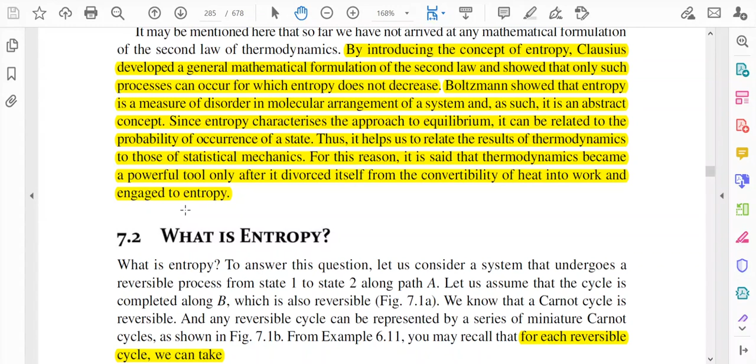So what is entropy? To answer this question, let's consider a system that undergoes a reversible process from state 1 to state 2 along path A. I will show you the figure shortly, but let us assume that the cycle is completed along path B, which is also reversible. Now let me show you the figure.

So this is the figure. This is state 1 to state 2. This is a path, the cycle goes 1-A-2 and then it is completed from 2 to 1 through path B. So it is a cyclic process. It goes first through path A, and then from 2 to 1 through path B.

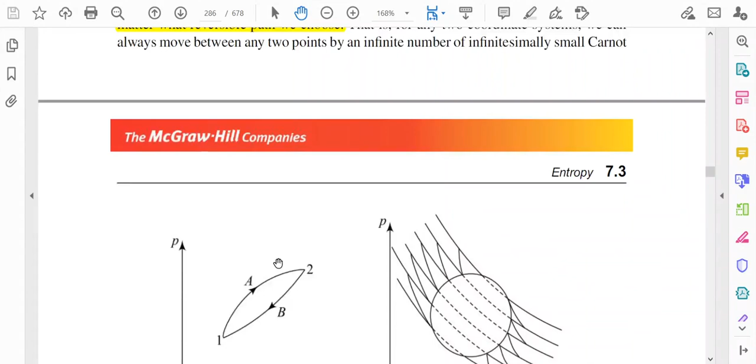And this is basically a reversible process. We know that a Carnot cycle is reversible. We have already discussed the Carnot cycle, and any reversible cycle can be represented by a series of miniature Carnot cycles, which is shown in a figure.

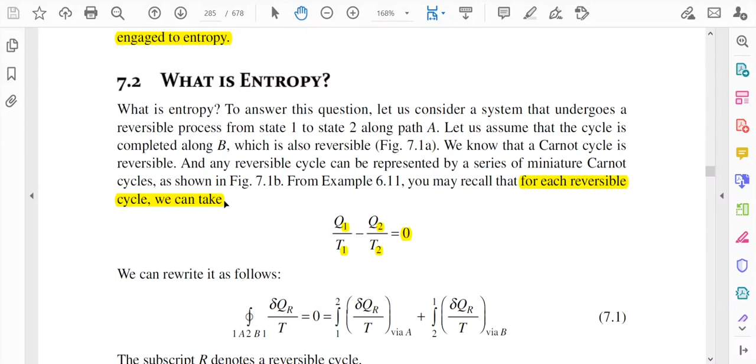I will show you the figure. Now you see this circular path — this is a cycle and it is a reversible cycle. Inside the circle, a series of curves has been drawn. This curve is the isotherm, and the steeper curve is the adiabatic curve. Two types of curves are drawn here, you can see it clearly. For example, this one is isothermal and the steeper one is adiabatic. This is isothermal, again adiabatic. In this way several curves are drawn.

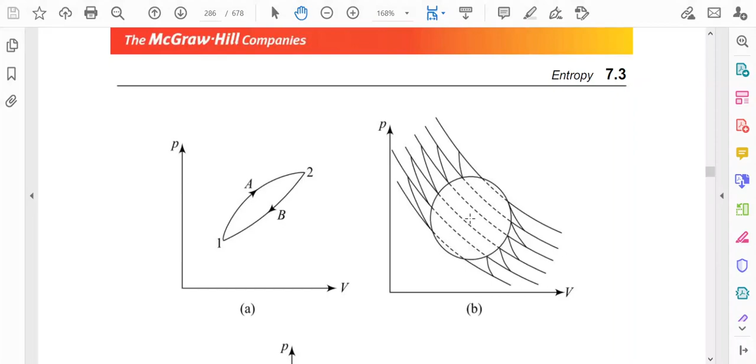Now these curves pass through the circle. So if you consider a particular rectangular path, for example, this one, we can consider it almost a rectangle. In this way we can divide the circle into a series of rectangles, and we can consider these as Carnot cycles. So a cyclic process can be divided into a series of Carnot cycles.

Now in our earlier lecture we discussed that for a reversible cycle, the algebraic sum of q by t is equal to 0. From that concept we can write that for each reversible cycle, q1 by t1 minus q2 by t2 is equal to 0, as shown earlier that the sum of q by t is equal to 0.

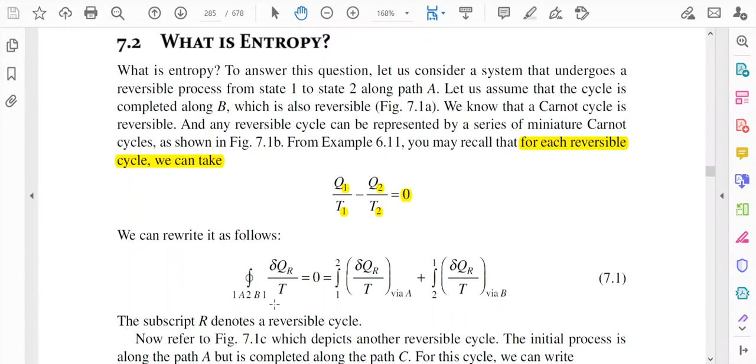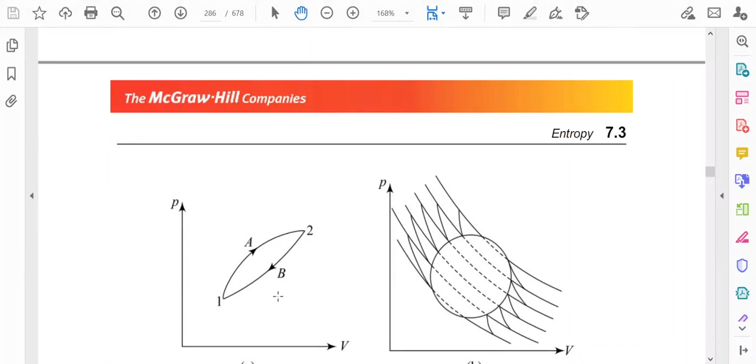So we can write, from that concept, the closed integration of delta qr by t, through the path 1A2B1 — meaning 1A2B1 along this closed path, which is a reversible path. In this case, the reversible integral is equal to 0, from the concept that the sum of q by t is equal to 0.

Now we can divide the closed path into two paths: from 1 to 2, delta qr by t via a, plus from 2 to 1, delta qr by t via b. The subscript r denotes a reversible cycle. Here there is a subscript r, delta qr, written to denote the reversible cycle.

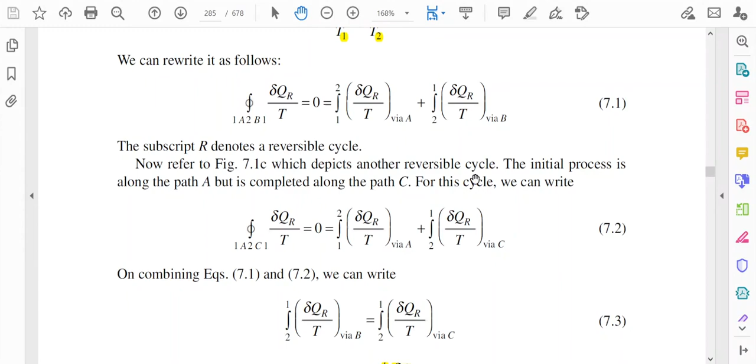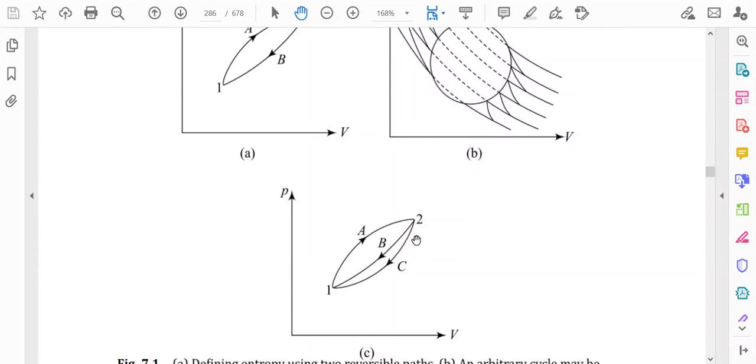So the initial process is along path A but is completed along path C. For this cycle we can write that the closed integration of 1a to c1, delta qr by t, is equal to 0. So if we consider 1a to c1, this closed path...

...then we can write that the closed integration of 1a to c1, delta qr by t, is equal to 0, and we can again divide the path into two paths: one from 1 to 2, delta qr by t via a, and another from 2 to 1, delta qr by t via c.

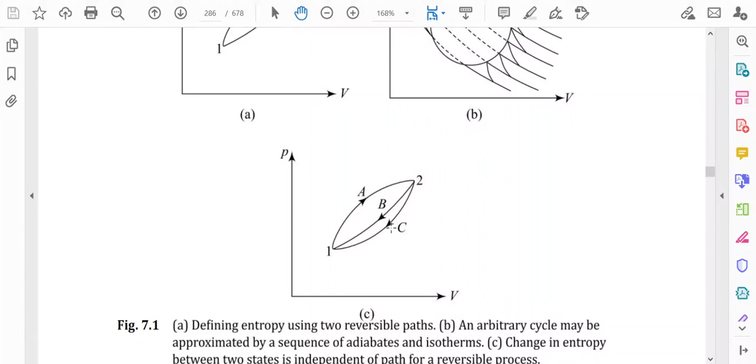Now if we combine these two equations, that is 7.1 and 7.2, then we can write that 1 to 2 delta Qr by T via B is equal to 1 to 2 delta Qr by T via C. In the figure you can see they have considered three paths: 1a to b1 and another path 1a to c1. That is, when the state moves from 2 to 1, it can go through two paths, one through point B and another through point C. Combining these two equations, we can show that delta Qr by T via B is equal

to delta Qr by T via C. This result strongly suggests that the integral 1 to 2 delta Qr by T is the same between states 2 and 1, no matter what reversible path we choose. We have shown in the last figure there are several reversible paths, but the value of the integration 1 to 2 delta Qr by T does not depend on the path. That is, for any two coordinate systems we can always move between any two points by an infinite number of infinitesimally small

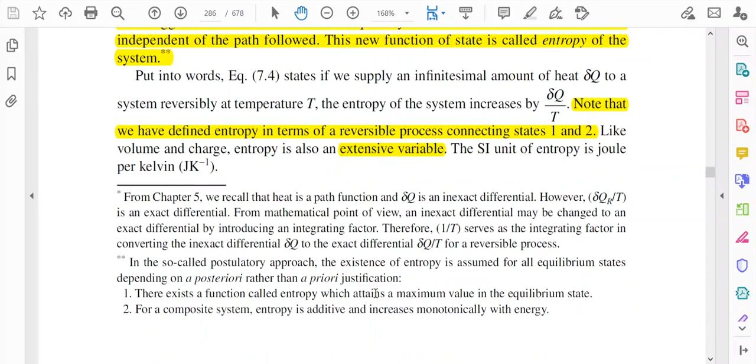Carnot cycles, and whatever path we take we will get the same result. Mathematically we can say that delta Qr by T is an exact differential, and we can write it as delta Qr by T equal to dS. This is the rule of the exact differential, which we know about. This suggests that we can define a new quantity S, which is a function of state and is independent of the path followed. This new function of state is called the entropy of the system. So here the quantity S is known as the entropy.

Put into words, this equation states that if we supply an infinitesimal amount of heat delta Q to a system reversibly at temperature T, the entropy of the system increases by delta Q by T. We have to note that we have defined entropy in terms of a reversible process connecting two states, state 1 and 2, and like volume and charge, entropy is also an extensive variable. The SI unit of entropy will be joule per Kelvin, as dS is equal to delta Q by T, so the unit of S will be joule per Kelvin in SI units.

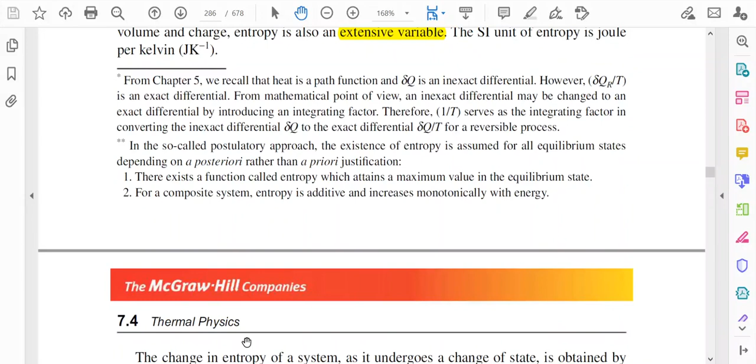The change of entropy of a system as it undergoes a change of state is obtained by integrating equation 7.4. If you integrate it, you get the difference of entropy in two states, that is S2 minus S1, equal to delta S, equal to the integral from 1 to 2 of delta Qr by T. So this equation enables us to determine changes in entropy along a reversible path in going from one state to another.

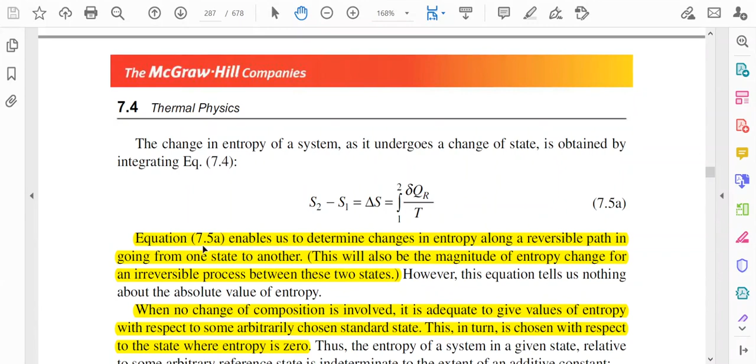This will also be the magnitude of entropy change for an irreversible process between these two states. So the difference of entropy, this line is very important: this will also be the magnitude of entropy change for an irreversible process between these two states. Although we have defined entropy in terms of the reversible path, the difference of entropy will be the same even though the process is irreversible.

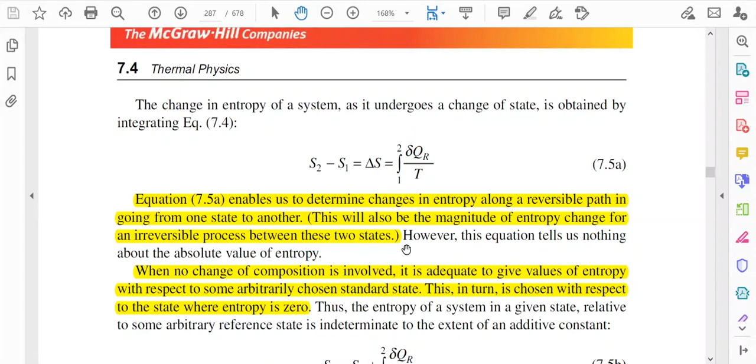But this equation tells us nothing about the absolute value of the entropy, because this is the difference of entropy. When no change of composition is involved, it is adequate to give values of entropy with respect to some arbitrarily chosen standard state. This in turn is chosen with respect to the state where entropy is zero. Thus, the entropy of a system in a given state relative to some arbitrary reference state is indeterminate to the extent of an additive constant.

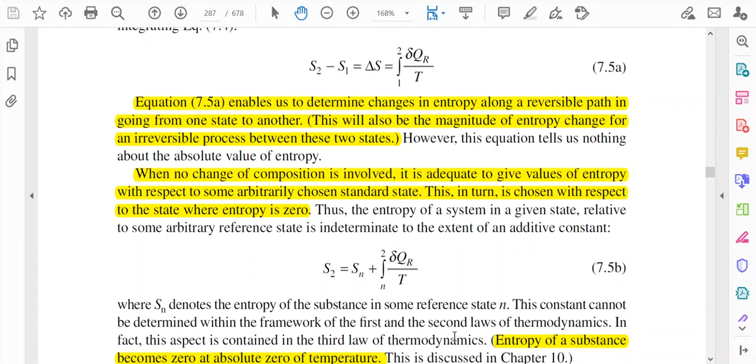That means we can write S2 equal to Sn plus the integral from n to 2 of delta Qr by T. Here Sn denotes the entropy of the substance in some reference state n. This constant cannot be determined within the framework of the first and second laws of thermodynamics. In fact, this aspect is contained in the third law of thermodynamics. The third law states that the entropy of a substance becomes zero at absolute zero temperature. So basically, the reference state is the entropy at absolute zero. In that case, we can say that Sn corresponds to the entropy of the state at absolute zero.

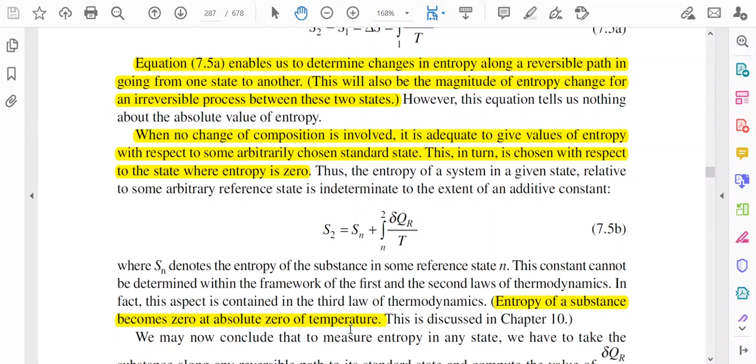So in that case, we can measure the entropy of a substance, which is the absolute value. Here S2 is the absolute value. If we want to measure the absolute value of the entropy, we have to define some reference state. Here Sn is the reference state.

We may now conclude that to measure entropy in any state, we have to take the substance along a reversible path to its standard state and compute the value of delta Qr by T along this path. So what we have to do is compute the value of delta Qr by T. But keep in mind that what we are actually measuring is the change of entropy.

Obviously, for a cyclic reversible process, there will be no net entropy change. Thus, we can write the closed integration of delta Q by T reversible is equal to 0. So for a reversible cycle, the closed integration of delta Q by T is equal to 0.

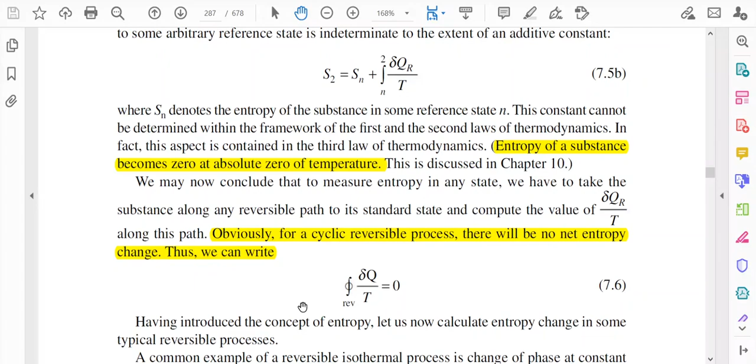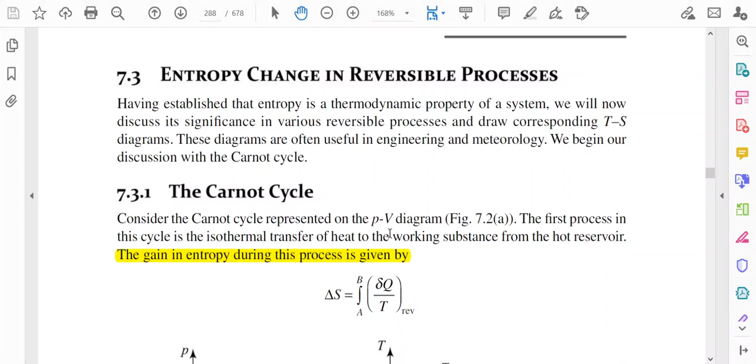Now we will discuss entropy in the context of the Carnot cycle. We have already discussed the Carnot cycle by drawing the PV diagram in earlier lectures. So this is the Carnot cycle in the PV diagram. Now we will discuss the Carnot cycle step by step by considering the concept of entropy.

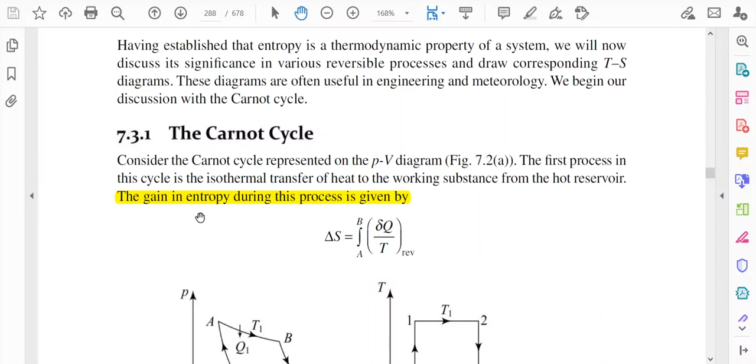The first process in this cycle is the isothermal transfer of heat to the working substance from the hot reservoir. The gain in entropy during this process is given by delta S, equal to the integral from A to B of delta Q by T, and that is a reversible process. So this is the change of entropy for the cycle AB.

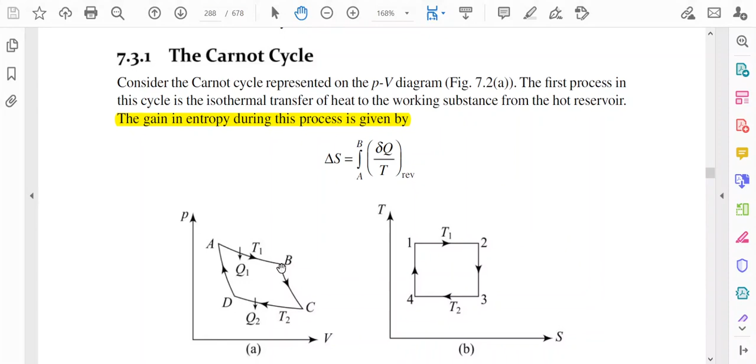Since the temperature of the working substance remains constant - you see this one is T1 - this equation can be integrated. Since T is constant, we can place it outside the integration. So we can write delta S equals 1 by T1 times the integral from A to B of delta Q, which equals Q1 by T. Here Q1 is the heat absorbed by the system.

This is shown as the horizontal line 1 to 2 on the TS diagram. You see, this axis is the entropy axis and this axis is the temperature axis. So what we have seen here is the change of entropy in this process, that is delta S, which is actually fixed.

This value is Q1 by T. Here temperature is constant and heat Q1 is the heat absorbed. So ultimately we can define the process by a straight line - here change of entropy, that is entropy change, and this one is the temperature. Here temperature is fixed, and delta S can be measured as Q1, the heat absorbed by the system, divided by T.

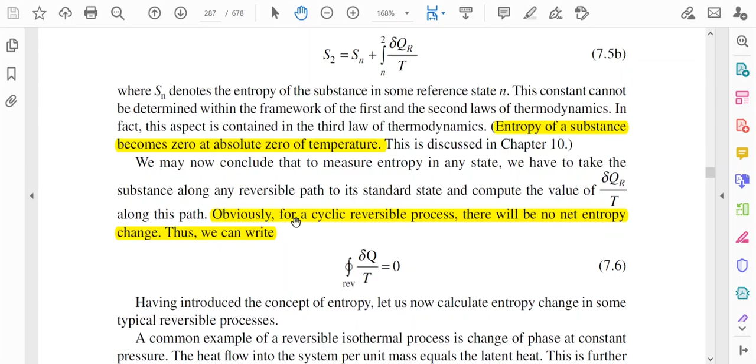The second process in the Carnot cycle is a reversible adiabatic expansion. Since no heat is exchanged in this process, delta Q will be 0, and it readily follows from equation 7.4 that entropy remains constant in an adiabatic process. You see equation 7.4 again: delta Qr by T equals dS. So if delta Q is equal to 0, dS is equal to 0, or S is equal to constant.

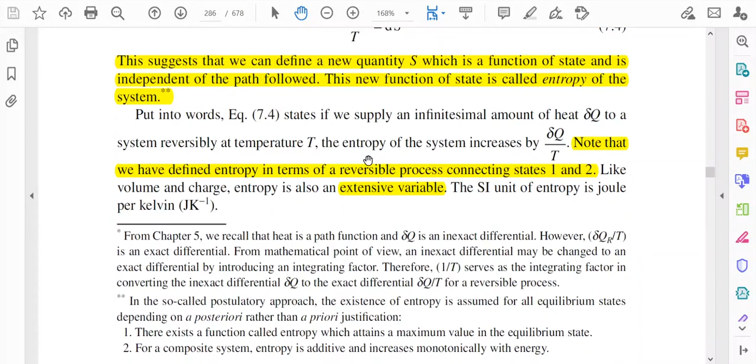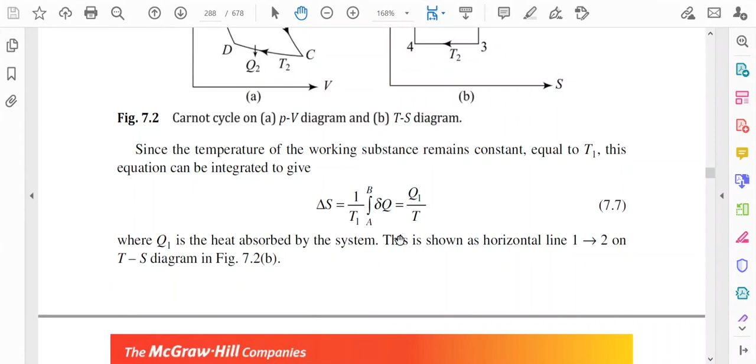So in the first process, the value of entropy change is given by delta S equals Q1 by T. But in the second case, dS is equal to 0, so entropy remains constant in the reversible adiabatic process. This step can be shown in this figure, and if this is the entropy axis, you see that the value of entropy is constant here, for the process 2 to 3.

Now let us discuss the third process. This is a reversible isothermal compression in which heat is transferred from the working substance to the cold reservoir. You see the PV diagram - CD is the third process. Here this is the Q2 amount of heat, which is transferred from the working substance to the cold reservoir, and the value of the temperature in this process is T2, which is constant.

So we can write delta S equals the integral from C to D of delta Q by T, reversible, and since T is constant, we can place it outside the integral. So we can write 1 by T2, but here we have written minus Q2 - this one is actually delta Q. So we have written minus Q2. The negative sign signifies that heat is rejected by the working substance during this process.

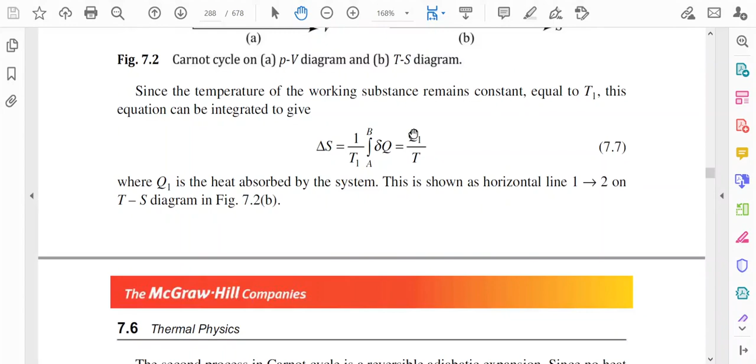If we compare this equation with the previous one, you see that this one was Q1 by T1 with a positive sign, and this one is Q2 by T2 with a negative sign. This equation indicates that the entropy of the working substance decreases during isothermal compression, as this is a compression process, isothermal compression. So in this process entropy decreases.

This is shown by the horizontal line 3 to 4, meaning that 3 to 4 is the isothermal compression process. Now in the third step, equation 7.8 indicates that the entropy of the working substance decreases during isothermal compression. We have already shown this in figure 3 to 4 through the horizontal line.

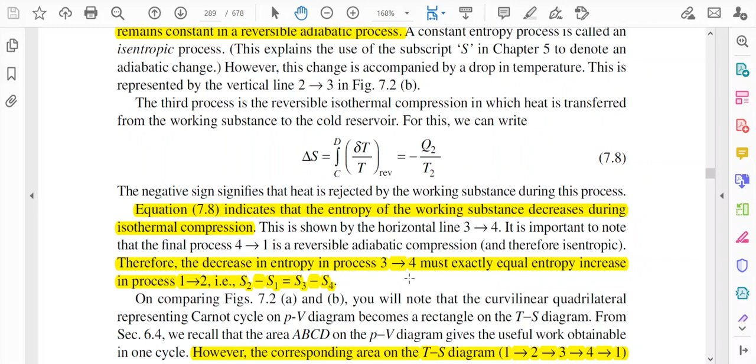It is important to note that for the final process 4 to 1, that is actually a reversible adiabatic compression. So therefore it will also be an isentropic process, that is entropy will remain constant.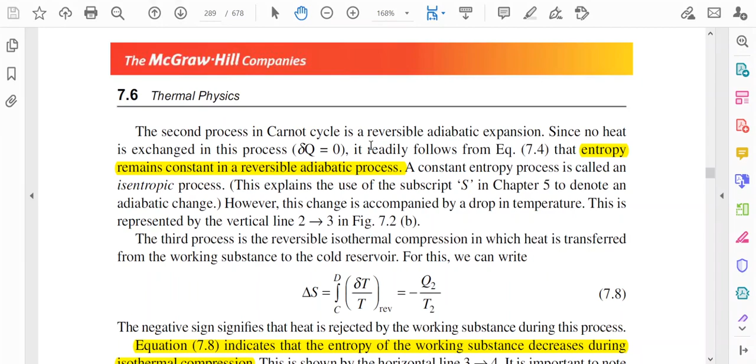Actually this process is just like the previous process, this line 2 to 3. In that case entropy was constant as delta Q was 0, so entropy remains constant. Similarly, this one was reversible adiabatic expansion, and the fourth process is the opposite, reversible adiabatic compression. It is not expansion, it is compression, but as Q is equal to 0, in this case again entropy will remain constant.

Therefore, the decrease in entropy in the process 3 to 4 must exactly equal the entropy increase in the process 1 to 2. We have observed that in process 3 to 4 entropy decreases, and in process 1 to 2 entropy increases. So those should be equal, that is S2 minus S1 equals S3 minus S4.

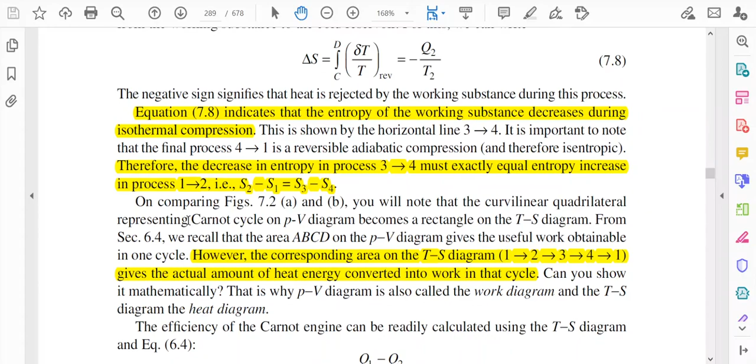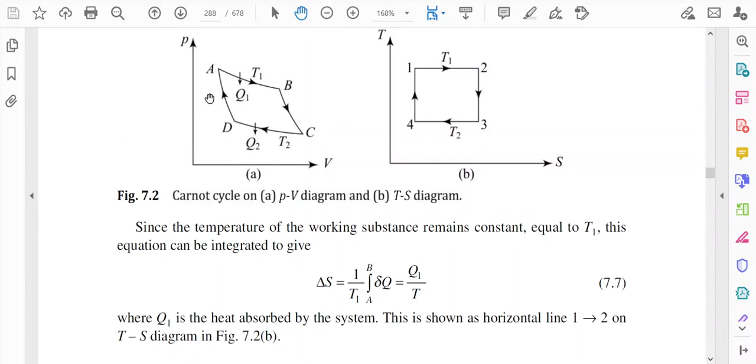Now if we compare figures 7.2a and b, both figures represent the Carnot cycle, but this one is on the PV diagram and this one is on the TS diagram. So if we compare the figures, we will note that the curvilinear quadrilateral representing the Carnot cycle on the PV diagram becomes a rectangle on the TS diagram.

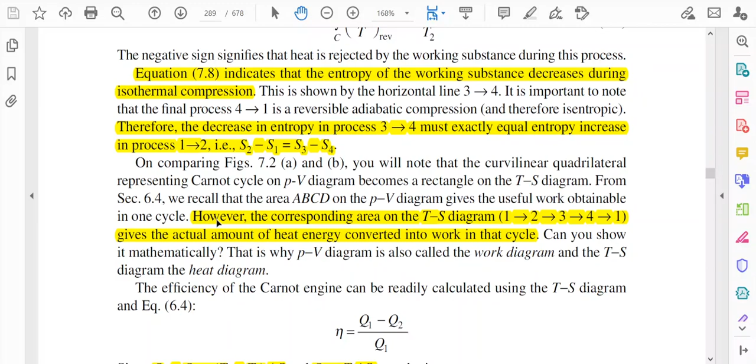We recall that the ABCD area in the PV diagram gave the useful work obtainable in one cycle. We have discussed that if we represent the Carnot cycle in the PV diagram, that area actually gives you the value of the useful work obtainable. But if we consider the TS diagram, then this is actually a rectangle.

So in this case the area under the curve will define the heat diagram, that is, it will represent the actual amount of heat energy converted into work in that cycle. Because what is the definition of entropy? That is, ds equals dq by t. So entropy represents the amount of heat energy being converted into work in a particular cycle. That is why the PV diagram is called the work diagram and the TS diagram is called the heat diagram.

So the area under the curve in the TS diagram gives us the amount of heat energy converted into work in that cycle. And the efficiency of a Carnot cycle, we know that eta equals Q1 minus Q2 by Q1. Now what is Q1 minus Q2? That is delta Q, equal to T1 minus T2 into delta S, because dQ equals T into dS, and Q1 equals T1 into delta S. So if we put these values here, we obtain eta equals 1 minus T2 by T1.

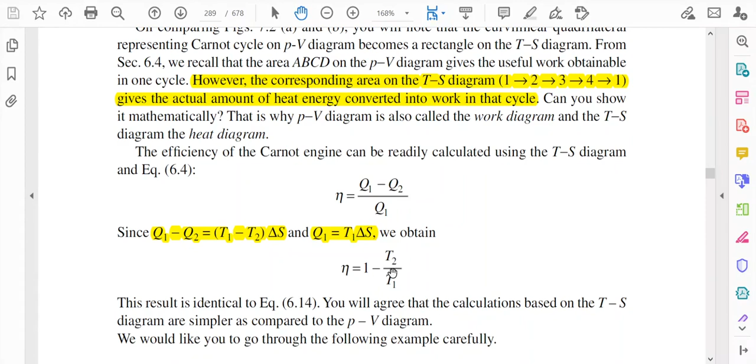Previously we observed that eta equals 1 minus Q2 by Q1. Now we have shown that eta equals 1 minus T2 by T1.

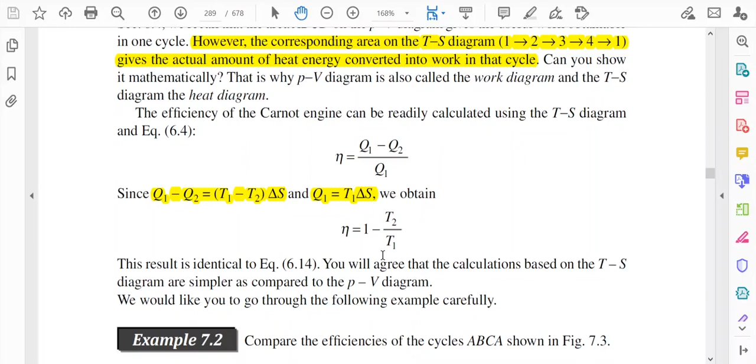Now we will discuss reversible heat transfer. In most reversible heat transfer processes, the temperature is not constant. Then the increase in entropy can readily be calculated from the equation delta S equals the integral from T1 to T2 of delta Q by T, reversible, when temperature is not constant. You see we have given a limit for the temperature, so the initial temperature is T1 and the final temperature is T2.

If we assume that the heat capacity of the system remains constant over the temperature interval of interest, and changes in phase are excluded during this process, we can express delta Q as mc into dT. M and c are constant, so they can be taken outside the integral, and inside the integral only dT will be there. After integrating we get mc ln T2 by T1. This is the expression for entropy change in the case of reversible heat transfer.

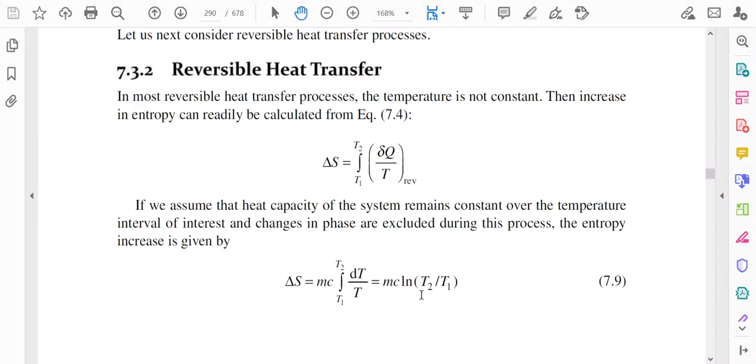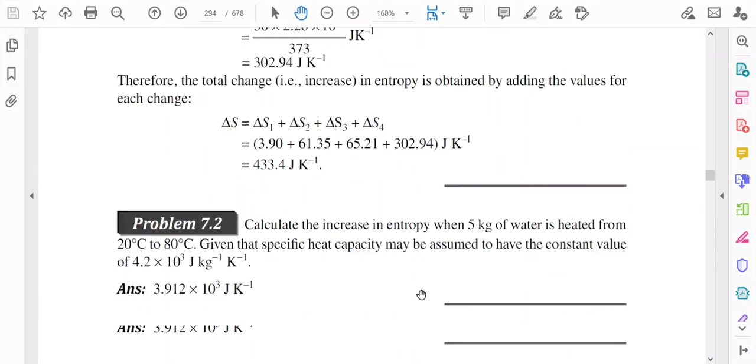Now we will discuss about Clausius inequality. We have already discussed the change of entropy for reversible processes, but a reversible process is a limiting case of a natural process. Therefore, to provide a criteria for the direction of natural change, we should generalize our earlier results for irreversible processes. The first step in this direction is to establish the Clausius inequality.

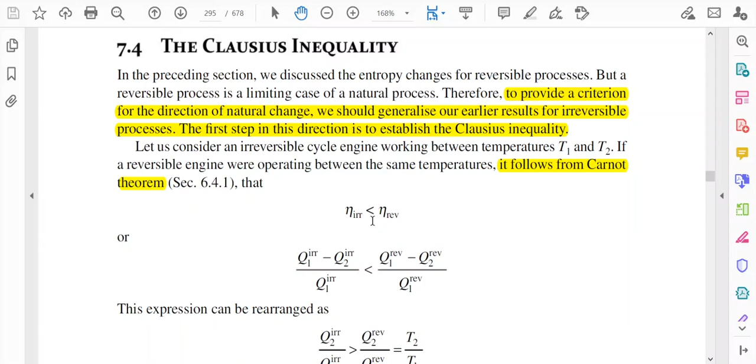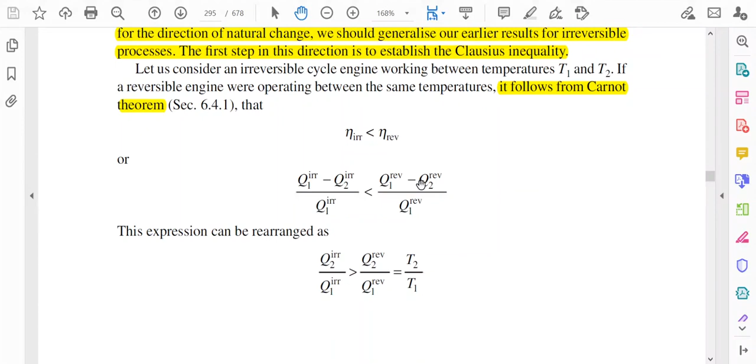Let us consider an irreversible cycle engine working between temperatures T1 and T2. If a reversible engine were operating between the same temperatures, we can say from Carnot's theorem that efficiency for the irreversible engine will be less than efficiency for the reversible engine, that is eta irreversible less than eta reversible. Now from the expression of eta we can write Q1 irreversible minus Q2 irreversible divided by Q1 irreversible less than Q1 reversible minus Q2 reversible divided by Q1 reversible.

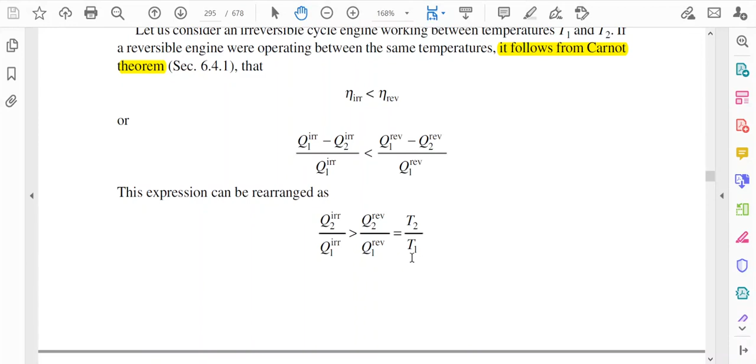After rearranging we can write Q2 irreversible divided by Q1 irreversible greater than Q2 reversible divided by Q1 reversible. But we know we can write Q2 by Q1 as equal to T2 by T1, as we have already shown. So from this inequality we can again write Q2 irreversible by T2 greater than Q1 irreversible by T1.

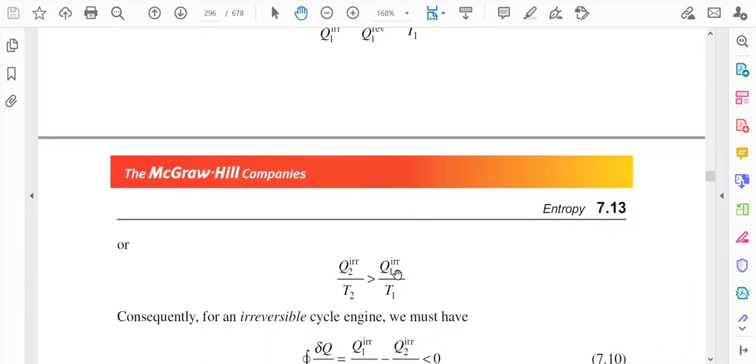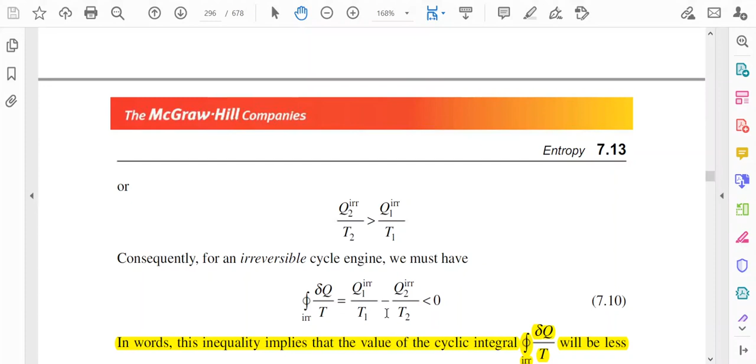So for an irreversible cycle engine we must have closed integration of delta Q by T equal to Q1 irreversible by T1 minus Q2 irreversible by T2. If we put this on the left hand side, we can write closed integration of delta Q by T equal to Q1 irreversible by T1 minus Q2 irreversible by T2, less than 0. In other words, this inequality implies that the value of the cyclic integral closed integration of delta Q by T will be less than 0 for an irreversible process.

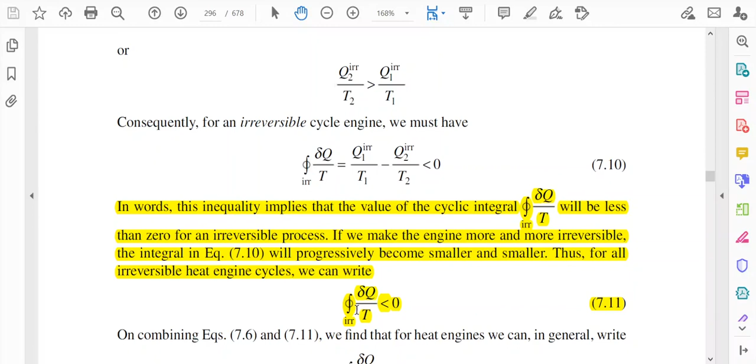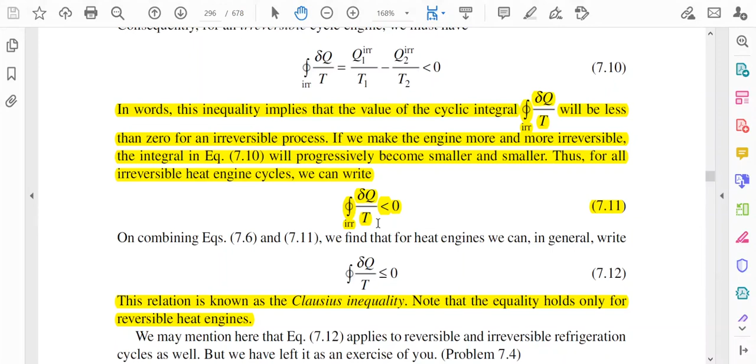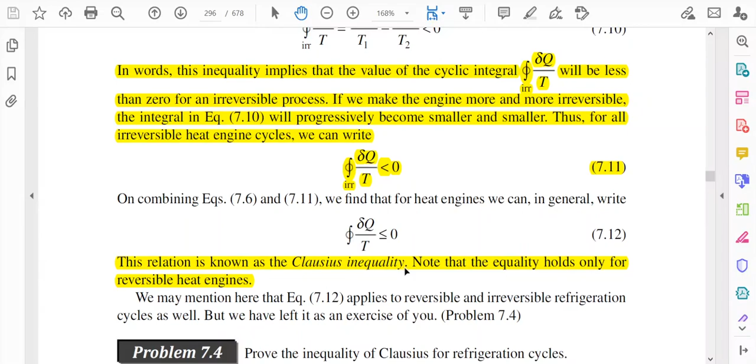If we make the engine more and more irreversible, the integral will progressively become smaller and smaller. Thus, for all irreversible heat engine cycles, we can write closed integration of delta Q by T less than 0. This is an important result. Now, for a reversible engine, we can write closed integration of delta Q by T equal to 0, as we have shown earlier. Combining these two equations, we can write in general, closed integration of delta Q by T less than or equal to 0. This relation is the famous Clausius inequality, and note that equality holds only for the reversible process, while less than is for the irreversible process.

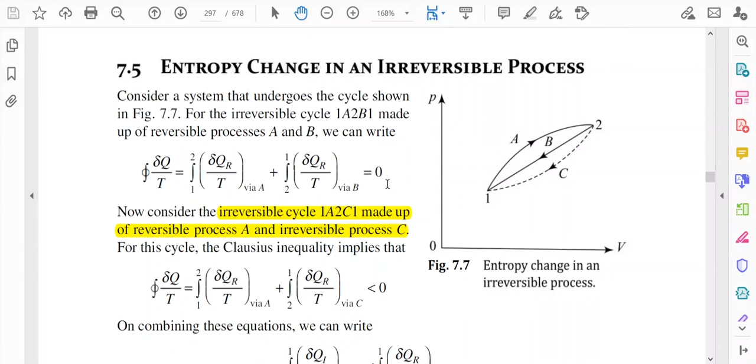So we can write closed integration of delta Q by T, that is equal to 1 to 2 delta QR by T via A plus 2 to 1 delta QR by T via B, that is equal to 0, considering these two paths.

Now consider the irreversible cycle 1A2C1, made up of reversible process A and irreversible process C. So C is an irreversible process. This dotted line is the irreversible process through path C.

Now for this cycle, the Clausius inequality implies that closed integration of delta Q by T, that is equal to 1 to 2 delta QR by T via A plus 2 to 1 delta QR by T via C. And as we are considering an irreversible process, we have to write less than 0, because this is the irreversible cycle and we have considered the path via C, so that should be less than 0.

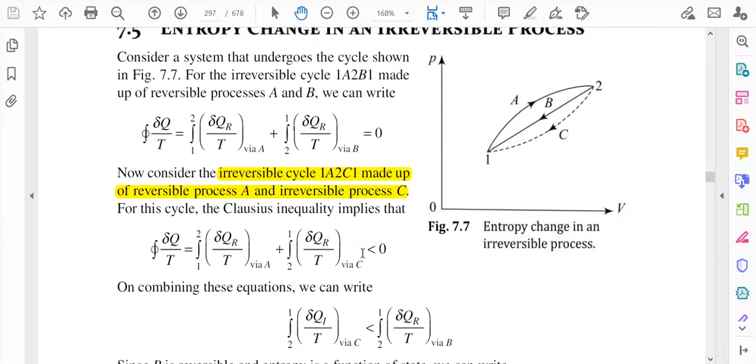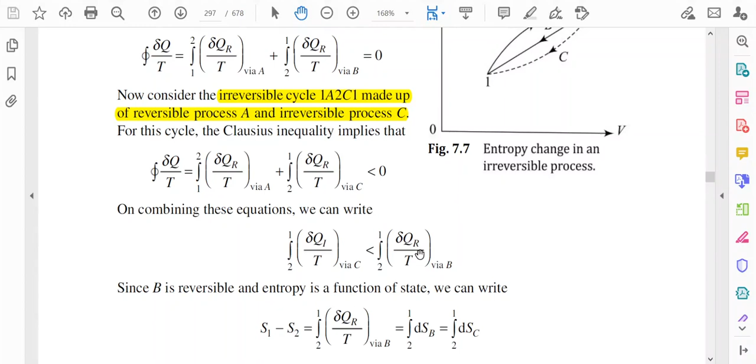Now if we combine these two equations, we can write 2 to 1 delta Qi by T via C less than 2 to 1 delta Qr by T via B, because via A these two equations will be cancelled out. So we can write this equation in this way, and as we have used via C, we have used the index i to indicate the irreversible process, and R to indicate the reversible process.

Since B is reversible and entropy is a function of state, we can write S1 minus S2 equal to 2 to 1 delta QR by T via B, that is equal to 2 to 1 dSB, equal to 2 to 1 dSC. So what is the meaning? The change of entropy depends on the two states only, not on the path. So S1 minus S2 equals 2 to 1 delta QR by T via B. We are writing 2 to 1 dSB, that is through B, and that should be equal to 2 to 1 dSC through path C.

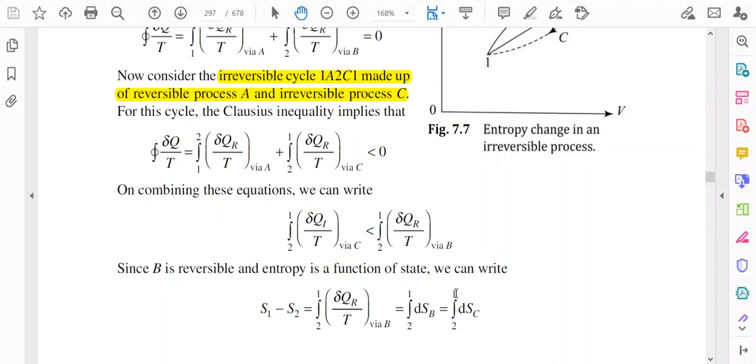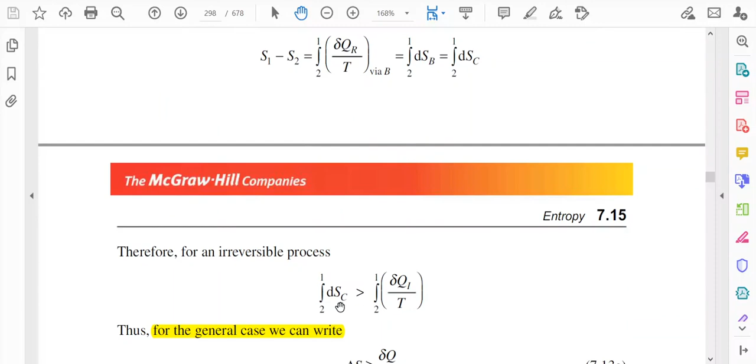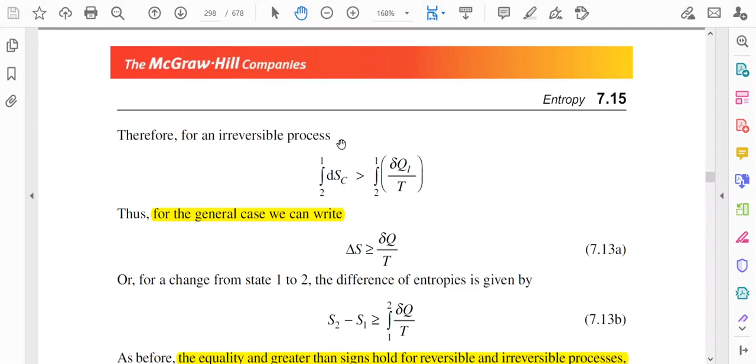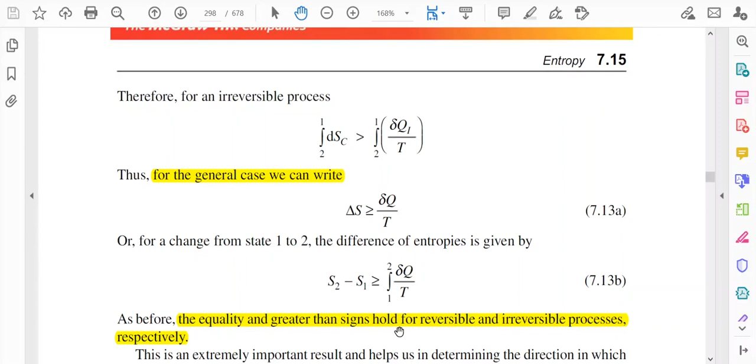Now if we consider this equation and the previous equation, we can write: 2 to 1 delta S greater than delta Qi by T. Here we have delta Qi by T, and we've used delta S on the left side. So 2 to 1 delta S greater than delta Qi by T, using two equations to write this one. For the general case, we can write delta S, the change of entropy, greater than or equal to delta Q by T, by generalizing this equation. Or for a change from state 1 to 2, the difference of entropies is given by S2 minus S1 greater than or equal to delta Q by T, 1 to 2. As before, the equality and greater than sign hold for reversible and irreversible processes respectively.

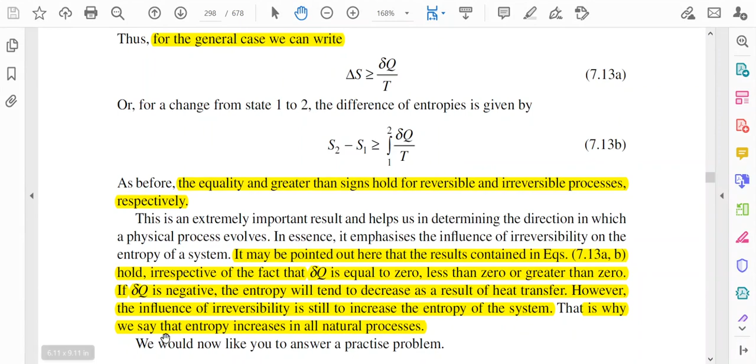This is an important result and helps us determine the direction in which a physical process evolves. It emphasizes the influence of irreversibility on the entropy of a system. The results in these two equations hold irrespective of whether delta Q is equal to 0, less than 0, or greater than 0. If delta Q is negative, the entropy will tend to decrease as a result of heat transfer. However, the influence of irreversibility is still to increase the entropy of the system. That is why we say entropy increases in all natural processes, and we will discuss how.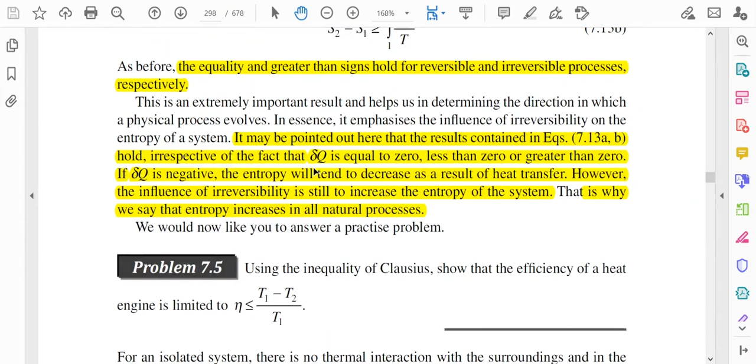But before that discussion, consider an isolated system. There is no thermal interaction with the surrounding, so in the Clausius inequality we have delta Q equal to 0. For this case, delta S should be greater than or equal to 0 if we consider the Clausius inequality, putting delta Q equal to 0. So delta S greater than or equal to 0, meaning the entropy of an isolated system cannot decrease. For reversible changes in an isolated system, the entropy remains constant, whereas for irreversible changes, the entropy increases.

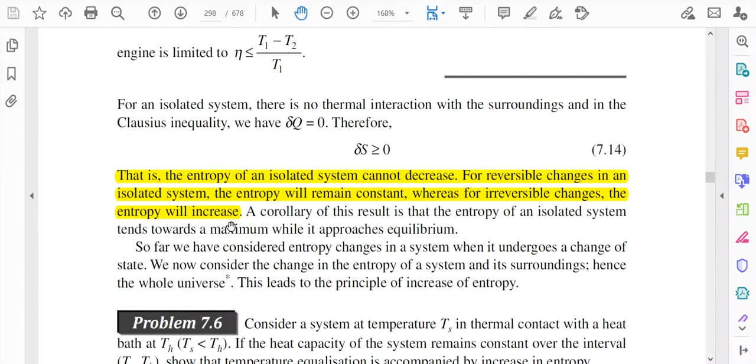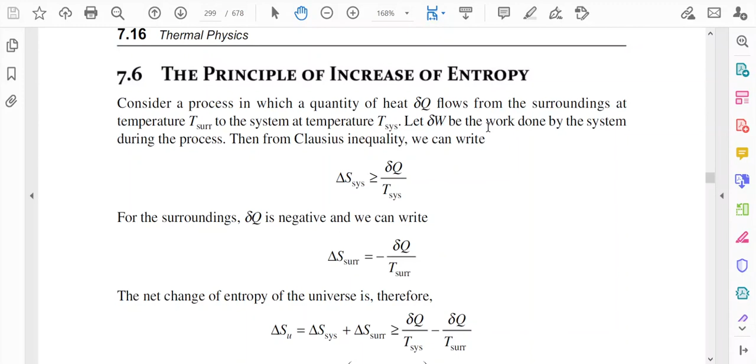Now we will discuss the principle of increase of entropy. Consider a process in which a quantity of heat delta Q flows from the surrounding at temperature T surrounding to a particular system at temperature T system. Let delta W be the work done by the system during the process. Then from the Clausius inequality we can write delta S system greater than or equal to delta Q by T system. For the surrounding, delta Q is negative, and we can write delta S surrounding equal to minus delta Q by T surrounding. Why is delta Q negative? Because delta Q flows from the surrounding at temperature T surrounding, meaning delta Q is coming out of the surrounding. That is why the negative sign.

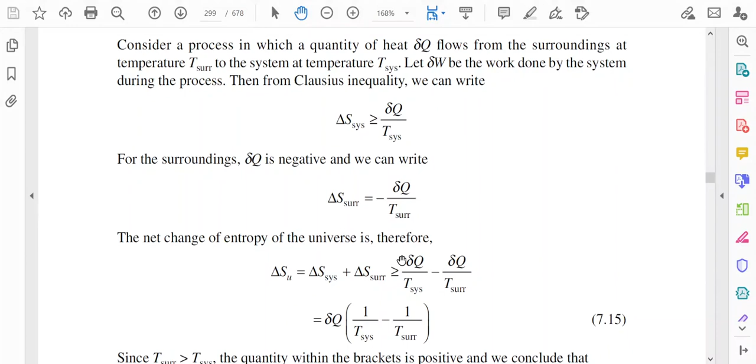So the net change of entropy of the universe can be written as delta SU, where U means universe, equal to delta S system plus delta S surrounding. Now, delta S system was greater than or equal to delta Q by T system, so we can write it as greater than or equal to delta Q by T system minus delta Q by T surrounding. After taking delta Q common, inside the bracket we have 1 by T system minus 1 by T surrounding. Now T surrounding is greater than T system, so the quantity within the brackets is positive, and we conclude that delta SU is greater than or equal to 0.

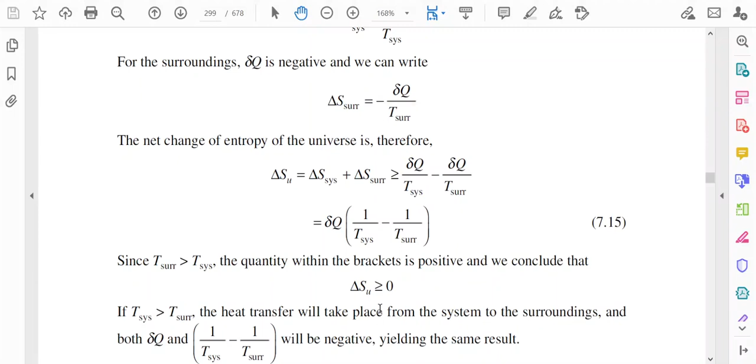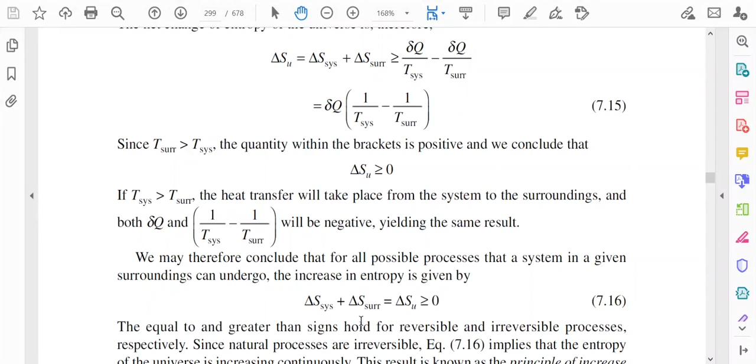If T system is greater than T surrounding, heat transfer will take place from the system to the surroundings, and both delta Q and the quantity in the bracket will be negative, yielding the same result. So we may conclude that for all possible processes a system in a given surrounding can undergo, the increase in entropy is given by delta S system plus delta S surrounding, equal to delta SU, greater than or equal to 0. The equality and greater than signs hold for reversible and irreversible processes respectively. Since natural processes are irreversible, this implies that the entropy of the universe is increasing continuously. This result is known as the principle of increase of entropy.

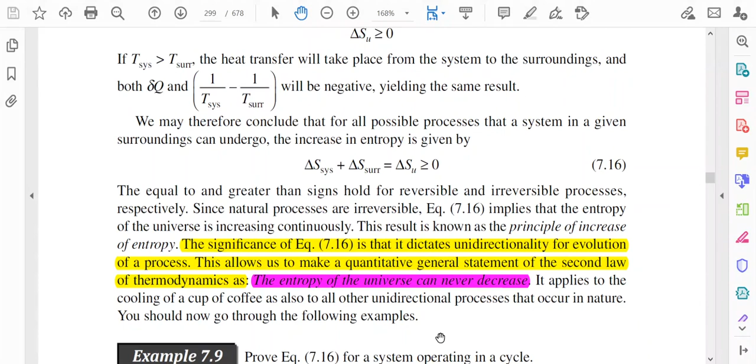The significance of this equation is that it dictates the unidirectionality or evolution of a process - unidirectionality meaning entropy is increasing in all natural processes. This allows us to make a quantitative general statement of the second law of thermodynamics: the entropy of the universe can never decrease. This is the statement of the second law in the context of entropy. It applies to the cooling of a cup of coffee as well as to all other unidirectional processes that occur in nature. So in all processes, entropy is increasing. Thank you for listening to this lecture.